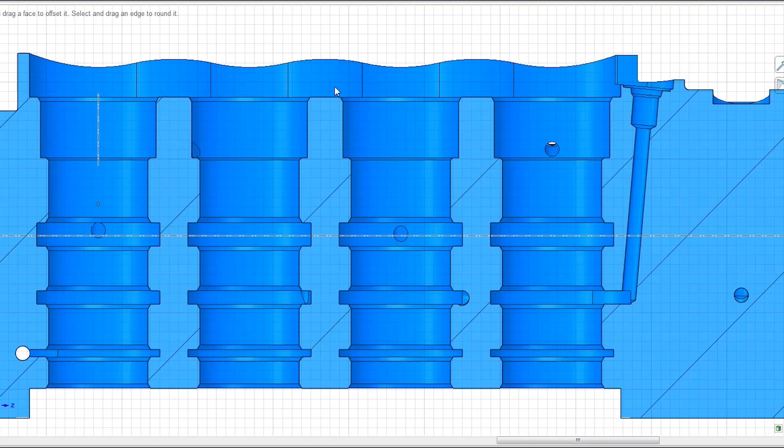Here's a section through the part that I'm dealing with, this titanium piece. Remember in the previous video we made this boring bar. And now we need another tool. We also made this undercut tool - there's an undercut here, and there's also one over here into that groove. But we still need one more tool.

We need this tool to cut these chamfers between the bore and the grooves. All these are 30-degree chamfers. So that's what this video is going to be about, making this tool here in order to do those chamfers.

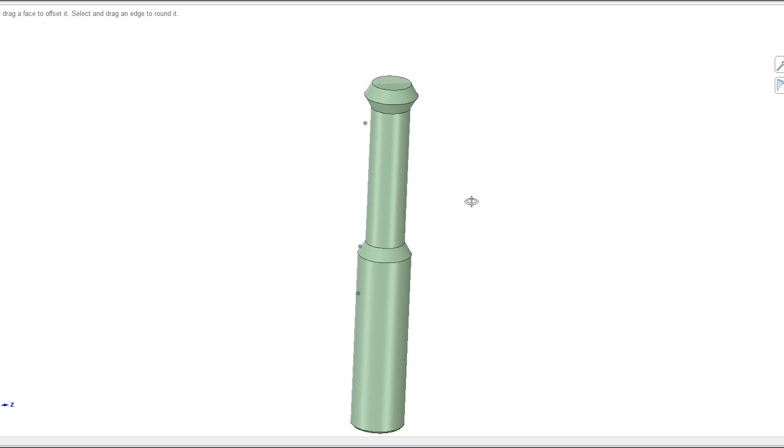This is starting at a 3/4 inch diameter blank, as you see here, and 5 inches long. Let's start a new model here real quick.

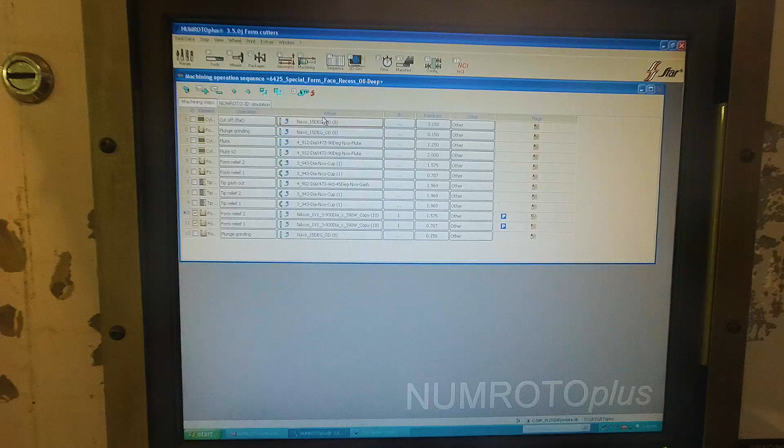This program here that you're seeing right now - I was making this tool for a customer, a local customer. They wanted to do some kind of a face groove like thing in the bottom of a bore, and this is the tool.

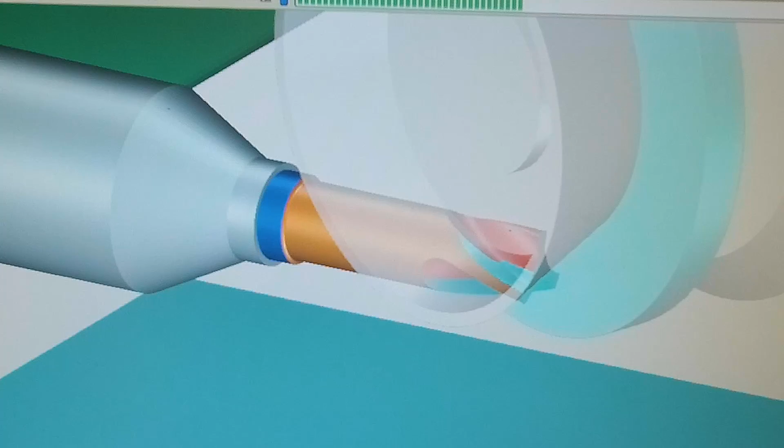So that's what this program does - in fact I could probably show you the simulation of it here. Might be interesting. Zoom in on it a little bit. So this is the tool I just showed you, and this is the simulation for it. There's the fluting wheel. The wheel that's highlighted in color is the wheel that's in grinding. It shows you kind of a ghost view of the other wheels as well, if there's more than one wheel on the wheel pack. So that's the simulation of that particular tool.

This is kind of a complex tool to grind here. You can see the geometry of it is, because of this recess on the face of it, kind of complex. This tool that we're going to program here is much more simpler than that. Anyway, that's the simulation of this tool.

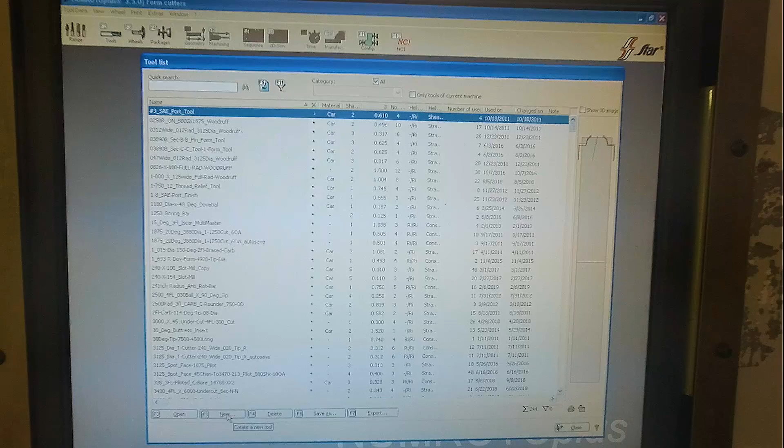I'm going to save this, and then what I'm going to do is, up here they have this little icon you can select, and I'm going to make a form cutter, and then make a new one, and manufacture it, not resharpen it. And for every form tool there has to be an initial form, at least one form.

So we're going to draw the profile that I was talking about on the drawing here. We're going to just draw this profile first.

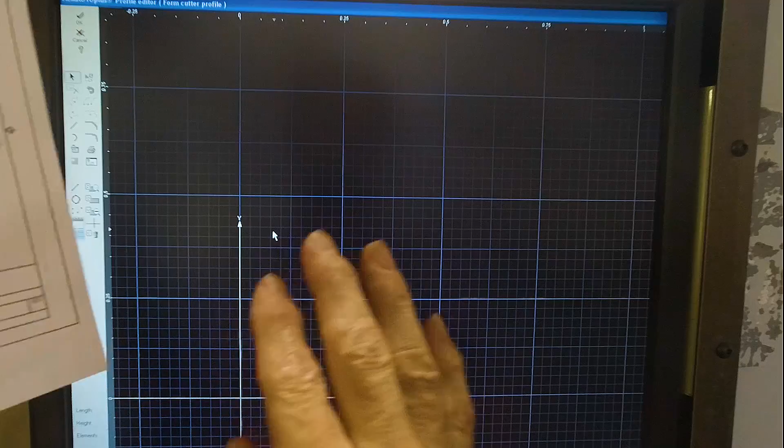So this thing is kind of reversed here, and the Y is going to be in the upward direction and the X goes this way. It's as if I flip this over, X being this way and Y being this way. In reality this ends up being like the Z-axis on the machine, but this is just the way this program works. So we have to make a line, and we've got to start it.

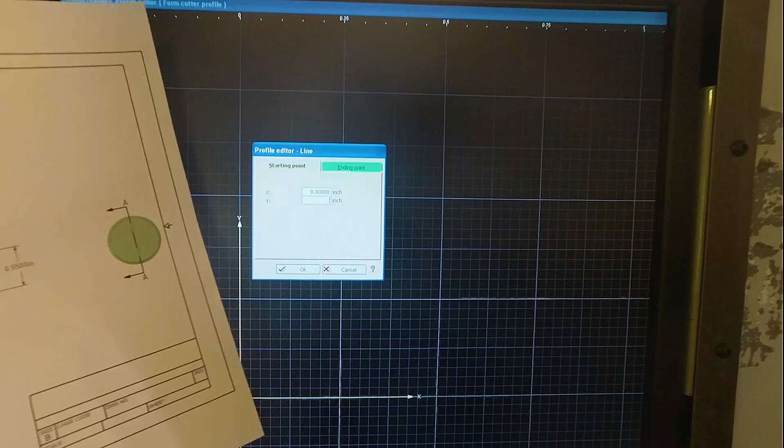Looking at the drawing again, 550 divided by 2, because this is a radius on this thing. So it's going to start at 0 on X, right? It's going to be 0.225, and then we've got to go to the end point, which is going to be 0.1732 tab.

And it's got a 30-degree angle. So we're going to go 0.375, half of 3/4. I must have the start point wrong. That doesn't look like a 30-degree angle, does it? What did I enter in wrong? Half of 550 is 0.275, right?

So half of 550 thousandths diameter is 0.275, and 0 is our start point. Okay, we're going to call that the first form, is what they call it on this thing. Okay, and we're going to say okay, and we're going to make another form.

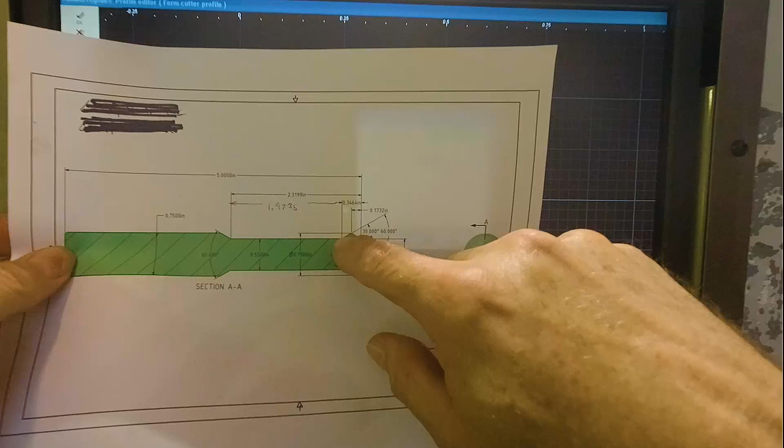We're going to do the back side of this form. So it's going to start at 0.1732, and 0.375, right, out there. And then we're going to go to the ending point, and you can enter a length and an angle here, but I know what the coordinates are of this.

The coordinates are 0.3464, 0.3464, and 0.275 again, like the other one. We're going to say okay. So that's the back side, our back chamfer cutting edge, if you will. Okay.

These here, you can kind of offset these profiles in the axial direction or the radial direction, or in the circular rotational direction on the A-axis rotation. So we can kind of see the beginning of our form right here. We've got the first one and the second one. Now I want to add another one.

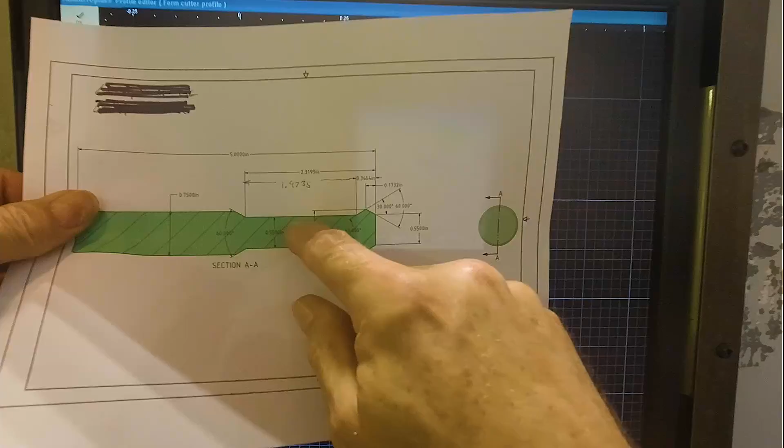This is just going to be for the purpose of grinding away this neck down area right here, and you'll see why later. It's going to think there's cutting edges on here initially when we process this into the program, the initial fields I guess, but we're going to delete those because we don't need cutting edges on there, of course. We just want that for the purpose of cylindrical grinding, if you will, off that area.

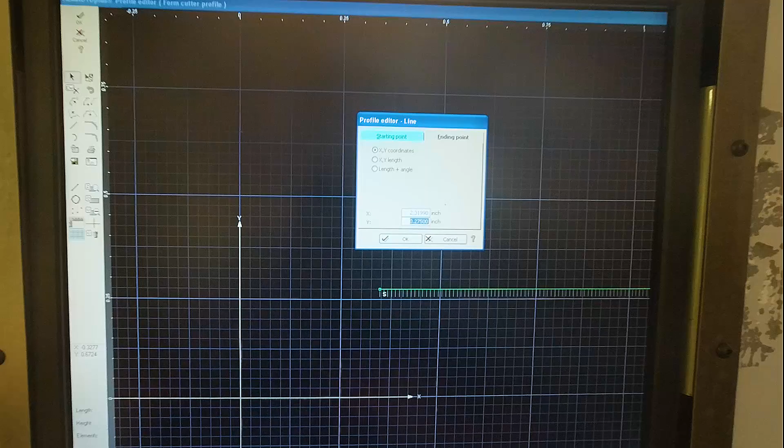So the X is going to be, the end of this is 0.3464, 0.3464, and the Y is going to be 0.275 again, which you can see that little start point right there maybe. Then we're going to go to the ending point and give XY coordinates again of 2.3199, 2.3199. Okay, so that's that one. Let's zoom back a little bit on that. I'm going to check that again, make sure it's not too long. Yeah, that's right. Okay, so we're going to go okay with that.

So we've got these three forms. You could do this all in one form, but I have found that it's better to do it in two different forms. It makes it easier to actually get it a little bit nicer when you grind it.

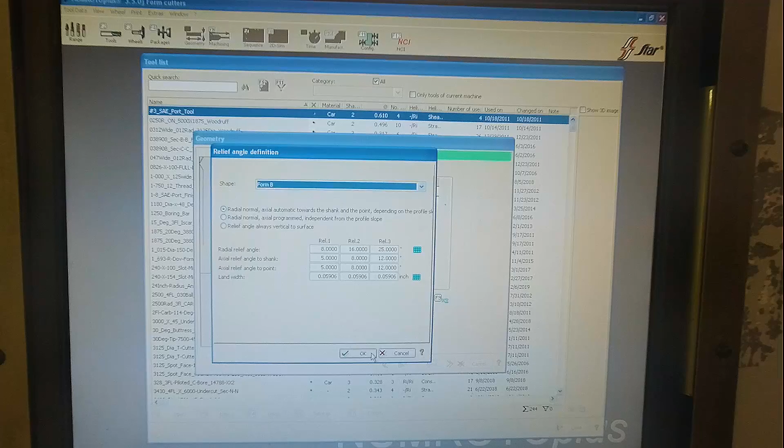Next, we've got to have a relief angle, and we're going to need relief angles on Form A and Form B. Form C, we don't really need them because we're not going to be grinding cutting edges on there. Form C, as you remember, is just for the neck.

And then we've got to have at least one helix. I'm going to make this a straight flute tool, 4 flutes. And the length was, this isn't really that critical, but it has to do with how long you're going to grind the flutes.

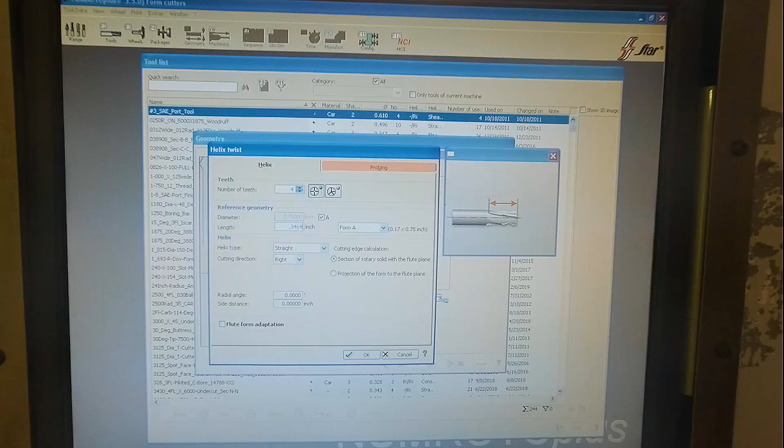But I'm just going to make it for right now 0.3464, the length of the last, this length right here. I can adjust the flute lengths anything I want in the flute grinding part of the program. Straight, right hand on form A is good. Form A and form B are actually going to be in the same place, but it needs at least one of these forms to know where to put the flutes, if you will.

Now on this software, you can do uneven, irregular pitch, I guess you'd call it—well, that's what they say here. You can put the flutes at uneven angles and things, but I'm not going to bother with that on this tool. I'm just going to make a plain 4-flute tool in this case.

So we would say OK. Then the next is the tip. If you want to have cutting edges on the tip of the tool like an end mill has, but we're not going to need that in this tool. We don't care about that. It's just a chamfering tool on the side.

So we'll go next. No coolant hole, carbide, and the blank here, it's kind of defined this blank the way it thinks it's going to be. It's pretty close. It's got a 5-inch long blank. I'm going to leave the rest of it alone, the default values.

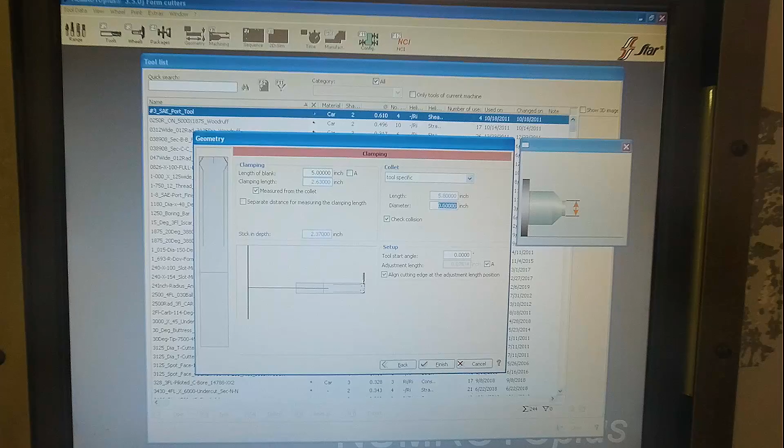Now I think I stuck this out — we'll see if this is long enough. I can always change this later. 2.630 — I think I stuck it out 2 5/8 from the collet, and I happen to know that the collet chuck and the collets are 5.8 inches long, and the diameter of that, let's just say it's 800 thousandths. So that's the basic representation of that. This can all be changed later if we find out we have a collision with the collet chuck.

Okay, relief angle. See, it kind of makes a basic program here for you, and you've got to assign grinding wheels and everything to this. Let's see, what are we going to use for this to grind this thing with? I think we're going to use...

First of all, we're going to insert an operation to just cut the end off flat. I usually do this with this grinding wheel, just so I'm sure where the end of this is.

We're going to go minus 0.4, and we're not going to retract along the path. No division means it's not going to do it every flute, it's just going to do it one time across the face. We're going to leave 0 stock on there, we want it ground flush.

I'm going to turn the... anytime you add or change a grinding wheel, you've got to specify the coolant nozzles it's going to use. So we're going to flute.

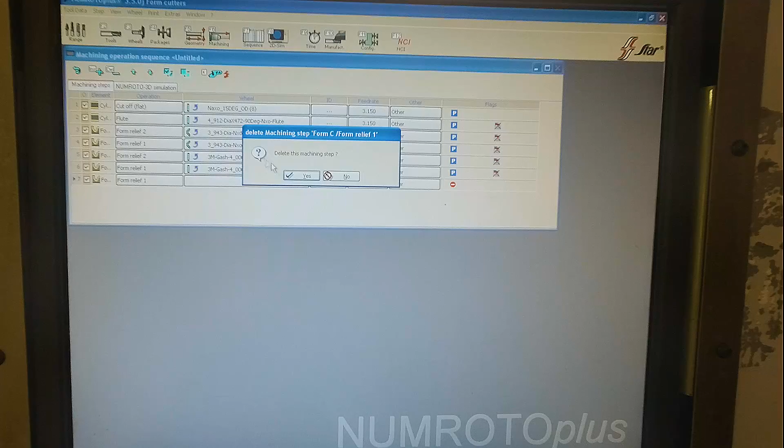Now I'm going to put the coolant valves on each wheel before I forget to do this. I can always do this later too, doesn't matter, but I'll do it right now. See, when it shows this little icon here, it says there's no coolant specified, and you usually don't want to grind anything on this grinder with no coolant on.

Okay, that's the basic program. Now I'm going to go in here and extend the flute length on the rear. I'm going to try 0.5 to begin with. I'm going to check these values here, the core, just to see what that looks like. So we're going to run the simulation just like this for right now.

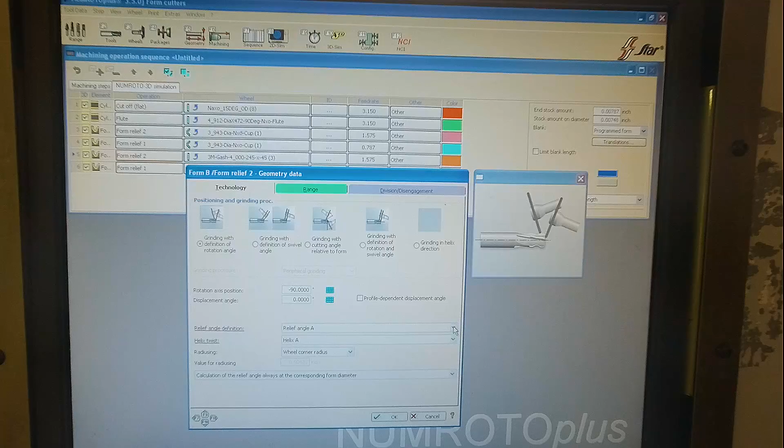Oh, I've got to change something here. I see, I forgot. I can use helix angle there, but I've got to have relief B on profile B, and relief B on that profile as well.

I'm going to change this to that, and that to that. On here, I'm going to change this. But I want to do face grinding with that wheel, 10-degree angle. I'm going to go minus, this is a 30-degree angle slope, so I'm going to go minus, say about 20 degrees. Let's try that, I want a little bit of an angle on the grinding wheel.

Change it to here and go minus 20. There's all kinds of different things you can do here on a relief, on a form tool type of profile, and you can actually specify the range.

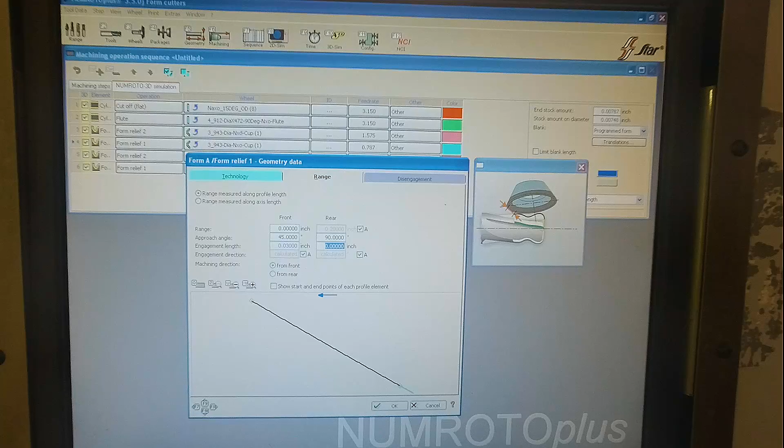In fact, I'm going to want to extend these. Should have done that before on the other ones too. I want to extend that one, I'm going to want to extend this one.

You can see it if I zoom back a little bit. You can see these little extra extensions it's put on the profile.

And on this one, I'm going to actually extend the one up here on this side 30, but I'm going to only extend this one about 10 because this is going up into my neck area of the tool. And also I might want to do a little bit of disengagement, change the disengagement on this too.

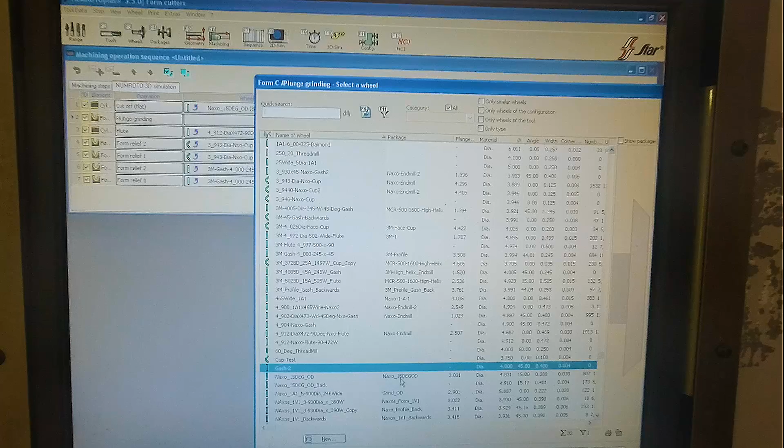I may want to grind, while I've got this tool here, I could insert, and on form C I can do a plunge grinding profile. This will be the neck of the tool, and I select the same grinding wheel as I'm using here, so I don't have to change grinding wheels too much.

Stock amount 0, I don't want to leave any stock on that. And swivel axis 15 degrees, the wheel has a 15-degree angle.

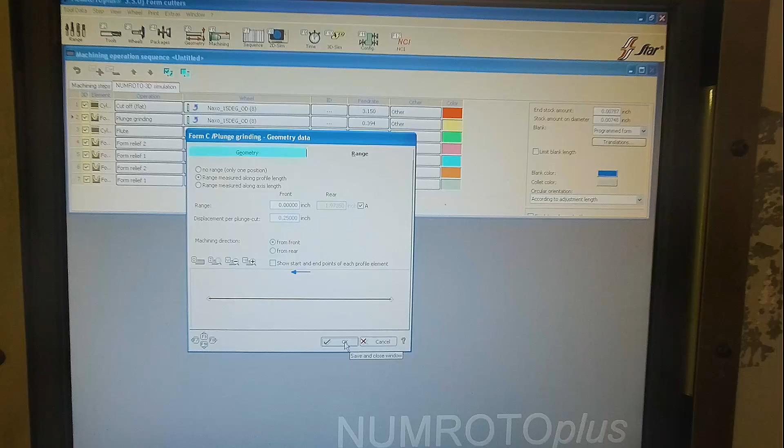And the range, displacement per cut, we'll try a quarter of an inch to begin with. That's going to be the amount it steps over every cut. I'm not sure, I might have to move this up on the end here a little bit. We'll see how that looks on the cutting end of the tool, if you will.

This I might have to rough off too with that grinding wheel. I'm just going to leave it like that for right now, just to see what we got going here. So that's the necking down. I'm going to have to adjust the feeds and speeds kind of on all of this still.

And I might want to rough in. Oh, see, this one's grinding on the wrong side of the wheel, so we got to change that, which is going to be over here, grinding position, grinds on the inner side of the wheel, as well as this one, both of those.

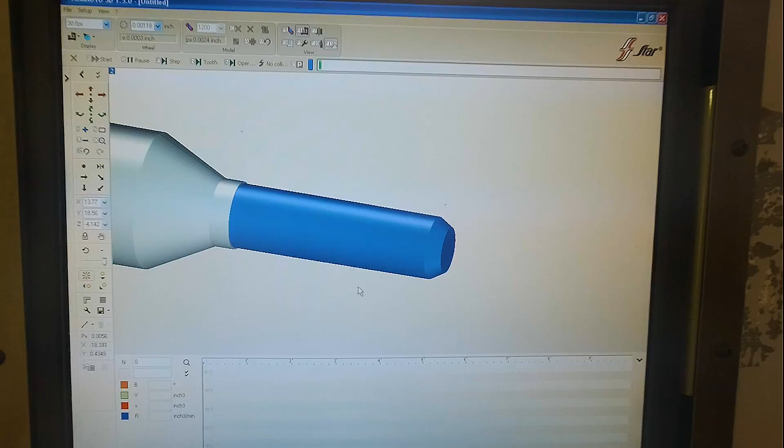Let's look at the simulation again. See, because it's totally ground away. I may want to try to rough off some of this material because I don't want my real sharp pointed wheel grinding that off. And I might want to reduce the core diameter here too, it looks like.

It doesn't look too bad, except I don't like, see that our flute is not going far enough up, see how the side of the back of the flute is kind of tapered. I don't want that, but it's getting close there.

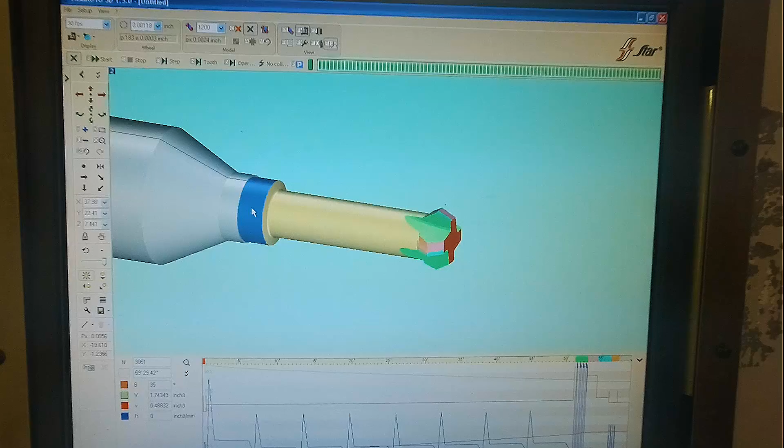Now I probably want to grind a chamfer up here, but I might have to extend the tool out a little further out of the collet chuck to do that.

Let's go back further with the flutes. See, these are the kind of things that you— I'm going to reduce the core to 0.25, there.

You can play with the geometry and everything of these. If you have, you can put flute wash out on the end. I don't think— well, let me put that on the end. Let's see how that looks. It might help a little bit too.

I don't like to change too many parameters at once. Otherwise you can't remember exactly everything you did.

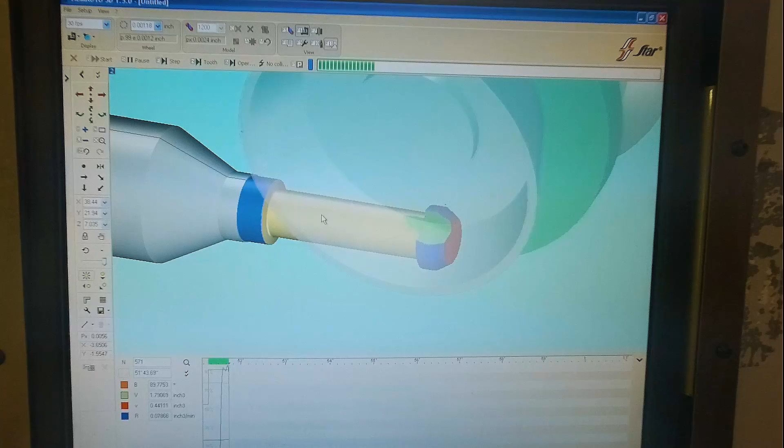Okay. I didn't like the way that— I don't like the width of these lands. I'm going to reduce them. I didn't like the way, I thought I had face grinding. Oh, I didn't put it on both of these. I put it on this one.

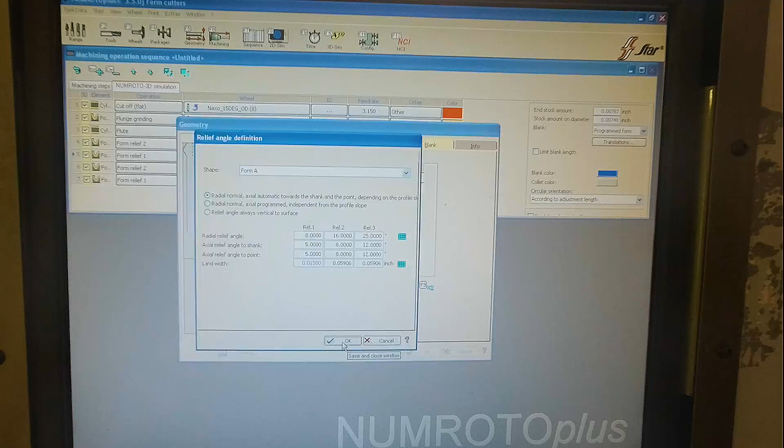Okay, that. I'm going to go up here to my relief angles, or my relief definition, if you will. And I'm going to put 0.015 for the— if you have, I only have 2 lands on here, but if you have multiple lands, then you have to do this second one.

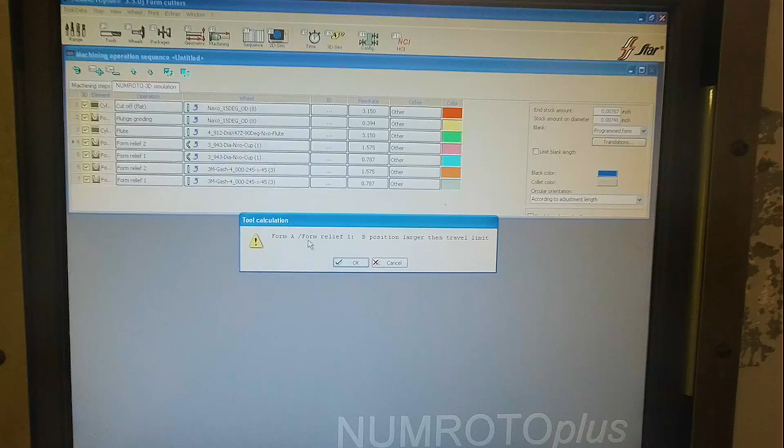Form A, relief 1. Wait a minute, let me look at this. What did I do here? Minus 10 degrees. Well, this was 20 degrees, right? Oh no, minus 20 degrees. I just didn't enter that in correctly.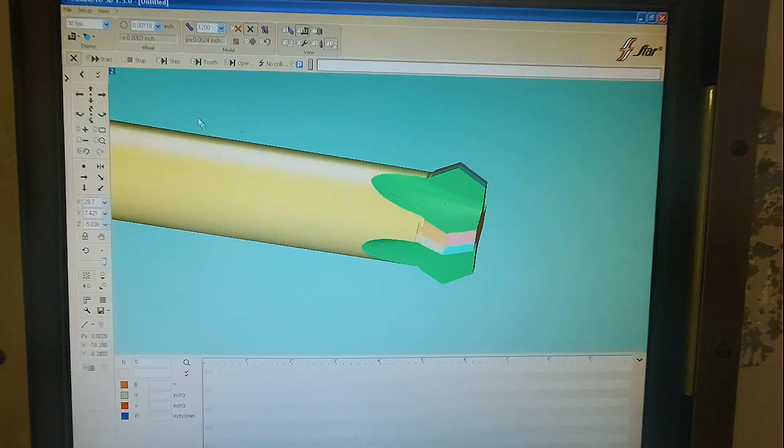See, so this is what you go through. You kind of make changes, run the simulation until you get this picture to look the way you want. That's basically all there is to it. But there is a lot of different settings you can make, as you can see already.

See, I don't really want to grind all that meat off with that delicate grinding wheel, if you will. And I might want to even reduce this core a little bit more.

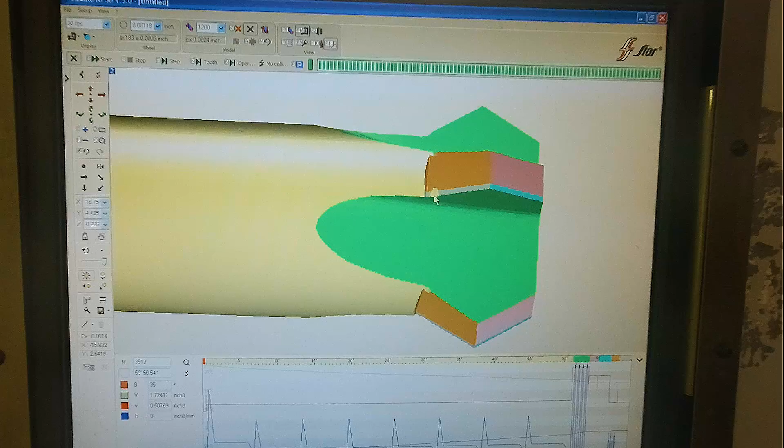See, I'm hitting in here with my grinding wheel that's necking this down, so I might want to move that out a little bit. I'll just make these little changes. Let's move that out 30 thousandths, like that. Make these little changes one at a time.

Because like I say, I think I'm going to actually make two changes here. I'm going to do this core. I'm going to go down to 0.200. See what that looks like. It might be too much though.

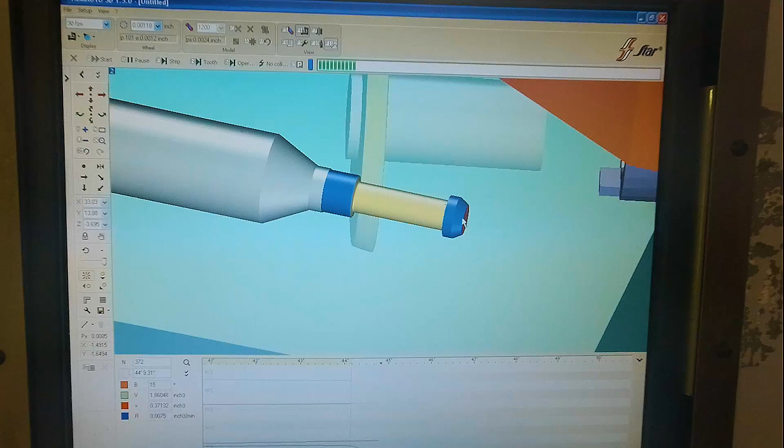I'm going to put another profile in here to take this grinding wheel and rough off some of this stock and this. I actually need to draw the blank the way it really is.

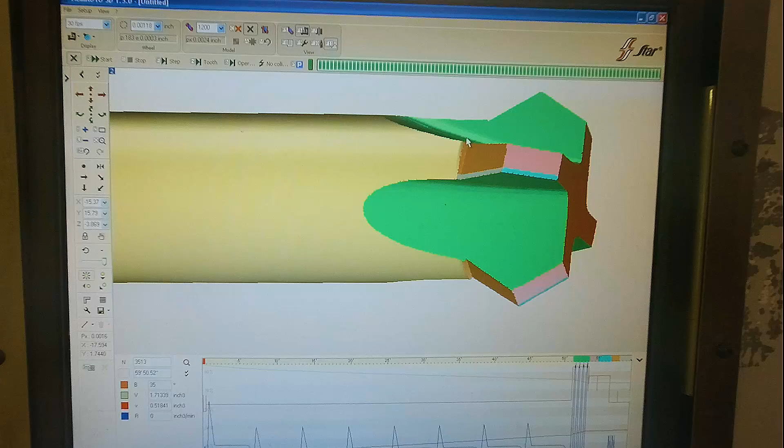Okay, that looks better. I'm going to extend the back of this a little bit more up in. See how I've got this little ridge here? I'm going to extend the back of that a little more up into the

neck down area. I'm going to also redefine this over here. This is end stock amount. We'll put 30 and no stock on the diameter of the blank. This is going to make it look like a cylindrical blank like it really is.

And on these, the range. No, that's the wrong one. It's this backside. The range, I'm going to go also 30 thousandths into the. Might be too much. Let's see what that looks like.

So you're going to see the blanks different. It's going to ask me if I want to update it. You see now it looks more like it really does.

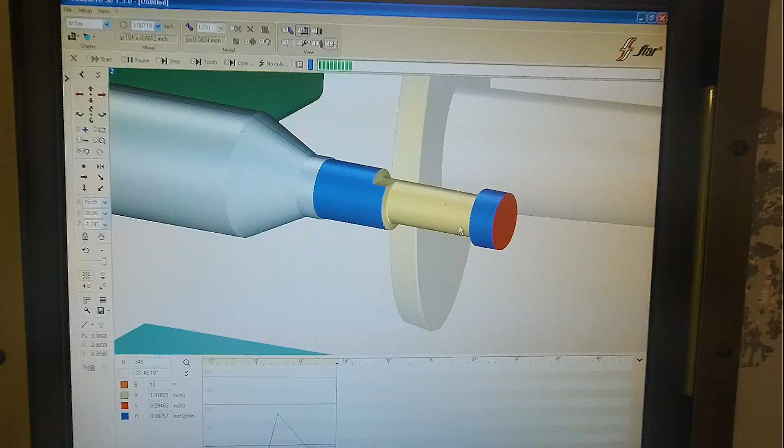Right now I just want to verify that I've got the basic program correct. I'm going to put these angle grinds in here with this wheel after I get things the way I like it here. So I don't have to take that big chunk off with the

more delicate wheels. So that looks pretty good. I'm kind of happy with the way that's starting to look.

So now let me think about how I need to put a profile to the plunge grinding. Let's do it after that. Insert a manual grinding path.

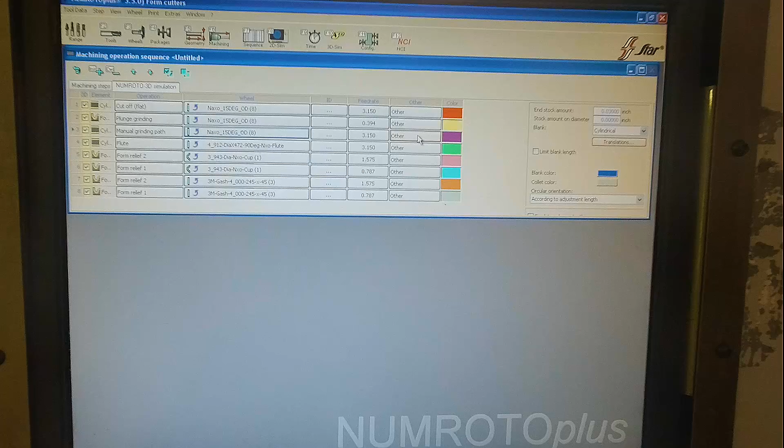Here, and this is a little bit. We'll put that same grinding wheel that I'm using above. Depends on what side of the grinding wheel I'm grinding on here. Which in fact, let's see, I'm going to be grinding on the front for this side.

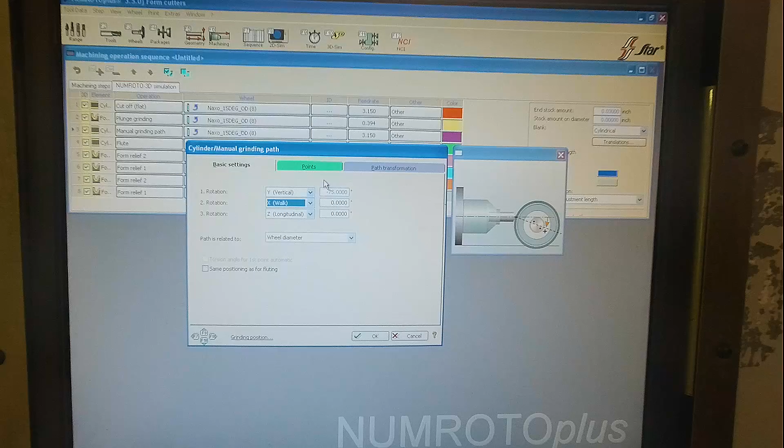So I'm going to tip this thing. I'm going to say negative 75 degrees. That's the y-axis rotation, which is really the b-axis.

I know the y, they call it y is vertical, it goes up and down, but the rotation, if you have it on a rotation, which is what this is saying here, it's going to rotate that. I believe negative 75 is going to be all right.

We're going to say we're going to come up minus 0.5. Everything in front of the Z normally on a CNC machine is in the plus direction, but on this programming it's in the minus direction. It's kind of like the Mazak is the same way.

Cross vertical, it doesn't matter, that's going to be up and down. We want it centered on the part. Cross is going to be in essence the x-axis, and we're going to say, well, actually I'm thinking about the way I'm going to do this.

Point. What, you got more? Those were the older ones on the 309 piece order.

Okay, 3/8. I'm going to try to just grind straight in with this one. So I could probably start here minus 0.1. I could start closer than that. And I'm going to move into this, something a little short of this dimension here.

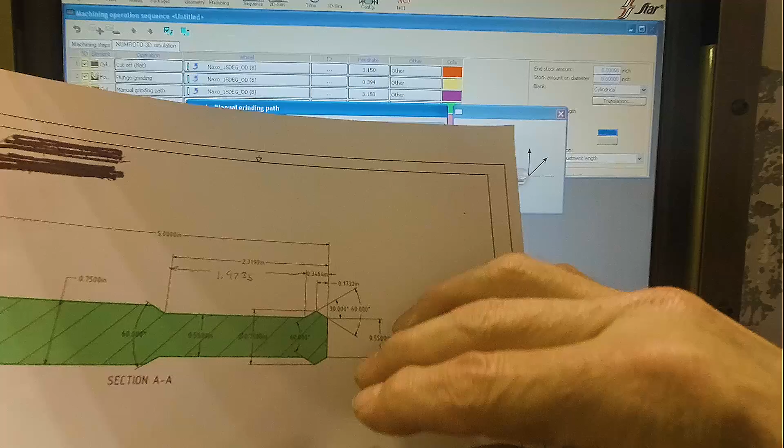So we got this wheel, it's going to be on this side, it's going to be tipped like this, but it already has a 15-degree angle on it. Well, actually, I've got this totally wrong. So this would be minus 90.

No, I think I do have it right. Minus 90 plus 15, 90 minus 15, it's 75. Yeah, that's right, I think I got that right. It's either minus or plus. I get confused sometimes with this.

And we're going to just feed straight in to 100. We're going to go a little less than 100 and, well, yeah, let's just go 173. We might have to adjust this Y dimension.

Well, actually, I'm going to go to 0. I'm going to feed that a little bit faster. We're going to leave it at 1 for right now. Then we're going to go to minus 0.173.

And here we're going to rotate 360 degrees doing it. And then we're going to stay there and rotate another 360. This is in the incremental mode here, so when I go back here, it's going to be 720.

So that just kind of cleans it off, because right now it's spiraled in, and then it's got to rotate another full revolution to kind of clean it off into a cone. And then we're going to move back to minus 0.5.

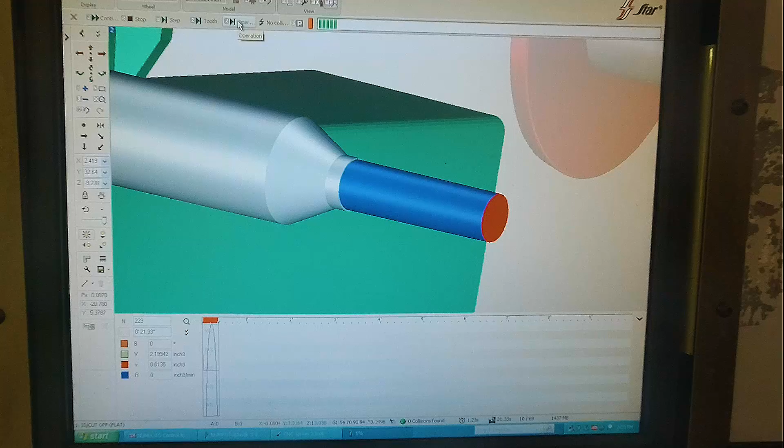We're going to run the first operation, which is facing it off. Next operation is doing the neck. This neck doesn't really have to have a good finish or anything, it's just clearance.

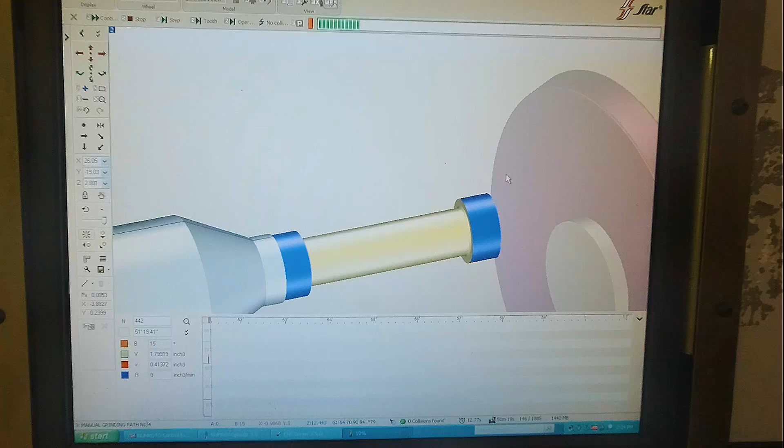Okay, now I'm going to step up to this. See, we're coming up here. We're obviously on the wrong side of X. See how we're opposite to where we want? So I got to go back here. See, I get confused about these sometimes.

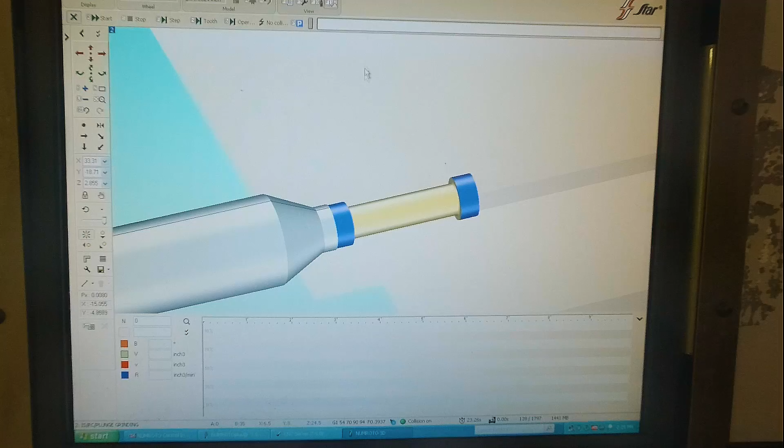I can jump back and forth between incremental and absolute, and get those all entered in at once. I can actually save this so I don't have to keep rerunning this graphics. So I'm going to save this as the tool blank right here when it finishes. I'm going to stop and save that. Then I can go back and just rerun this by unchecking those. So we're going to step into this here. Now you see I don't have to rerun those.

It's got the blank already. Okay, that doesn't look too bad, except it's going to be doing it 4 times for every 4 flutes, because I forgot to do this. Over here, division, I want to have a separate division of just 1 time.

Okay, so I think that's it. Down here at the bottom of the screen it shows me kind of my load, but it's hard to tell right now until I run the whole program to see what this load down here is in relation to the rest of it. So now I have to do this side of the thing, and I've got to think about how I'm going to do that here.

I'd like to do it with this same grinding wheel, and I think I can. Let me think about this. Okay, so I'm going to do another manual grinding path. Insert that.

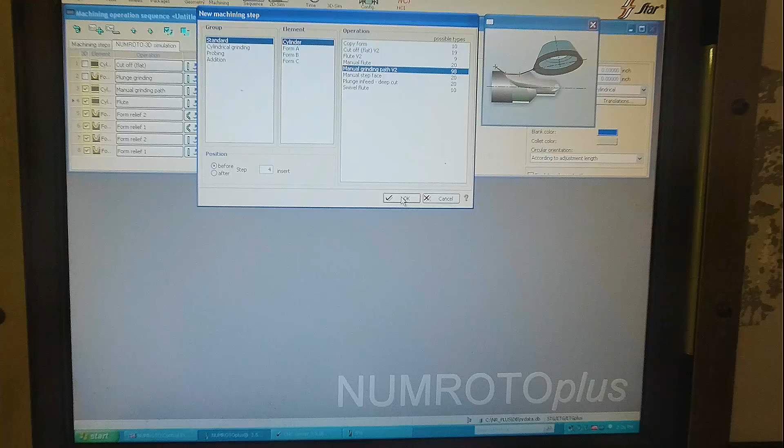And on the same grinding wheel, except now I want to tip this thing minus, it's going to be a 90 plus 45, minus 135. Let's see if we can do that.

And we're still going to grind on the front of the wheel, but we have to come around the part this time, so we're going to minus 0.5. We're going to start at 0.5. Well, no, we don't have to be that far away, we can be half of this, 0.450, we'll say. And we're going to go to plus, in this case, 346. This is just roughing off some stock, we're not going to worry too much about it.

And we're going to feed that kind of fast going forward. And then we're going to come into 0.375. And then we're going to go to 0.275, was half the size, so we're going to 0.275. We might have to adjust that a little bit. And let's make a revolution coming down in there like that. And then we're going to stay there, make another revolution. And then we're going to come back out.

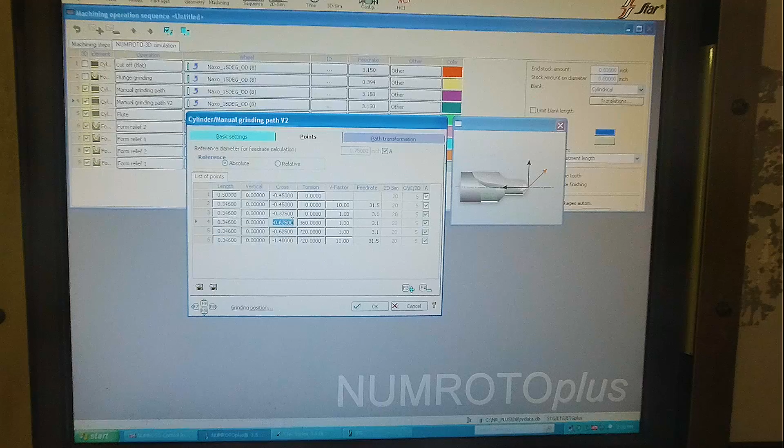These all have to be minuses though, don't they? To minus 0.5. I'm going to adjust feed rates and everything later, I just want to make sure I got this right. Let's just see if it likes that. So start, we're going to do that operation. That looked sort of alright. We've got to grind the whole tool to see if that is alright.

And then we should be able to come in here. Oh, it's liking it on this side. So I think my minuses are going to be wrong here. Not too bad. Okay, doesn't look too bad. I might have to add stock to that.

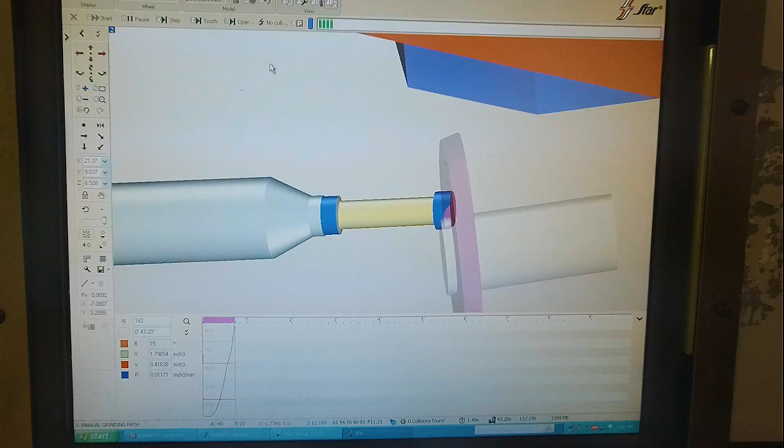And you see it's doing it every 4 flutes because, again, I forgot to check that right here on the division. Okay, let's grind the whole tool here and see what it looks like now. If we've left enough stock here we'll see it, if we haven't, see if it cleans up. It looked like it did alright.

So the only other thing, I'm going to want to grind a chamfer up here on this, just for a little bit of extra clearance and everything. So let me add that while I'm doing this. Insert, and I want to do another manual grinding path, same wheel. And this is going to be very similar to the first one.

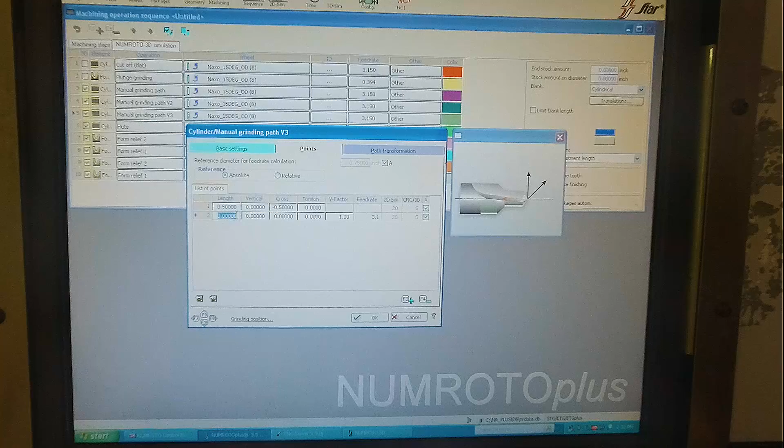So it's going to be minus 75 as far as the angle goes. Points are going to be, I'm going to start here at minus 0.5 in front of the part, and minus 0.5. We're going to go to, what was it, the end of that is 2.319. We'll go to 2.3, and also at minus 0.5. 10 times the feed rate. And we're going to come down to minus 0.375.

And that might be... well, we'll try that. Might be colliding with the stock right there. And then, actually we're going to be grinding with the back of the wheel in this case, so that might be alright.

And then we're going to go to minus 0.275. Might have to change these minuses to pluses because we're grinding with the back of the wheel. We're going to rotate it around once, and then go 720 and rotate around again. That should be... yes.

And then we're going to come back out minus 0.5, and we're going to do that at a high feed rate. Okay, but we're going to be grinding with the back of the wheel here. Grinding position, grinds on the inside, division only one time.

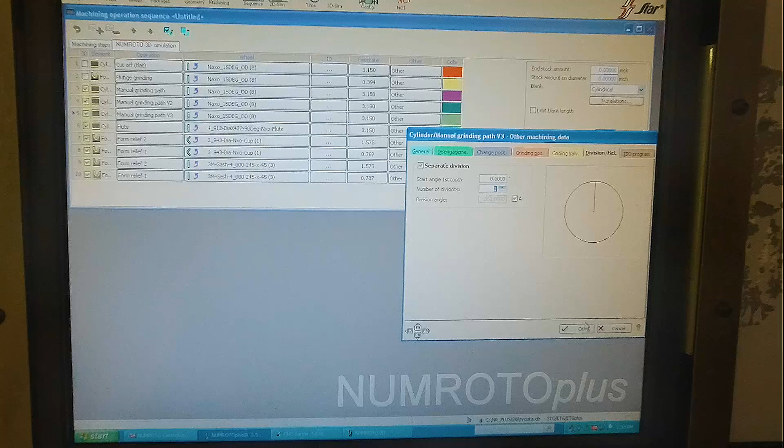Maybe, I think I might have something backwards there. Yeah. A lot of times when you reverse the face of the wheel, you got to change this angle to positive. I still might be on the wrong side of the deal too. Operation there, operation there, kind of looking at it.

Oddball here, now let's see what happens here. Yeah, see, I'm on the wrong side of the part because when you change the minus, it's going to be positives on these 0.5.

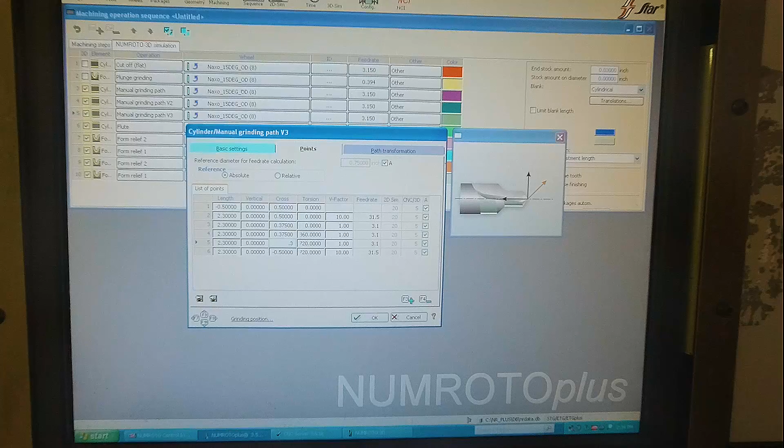We're going to see what it looks like. I don't want it to... I'd rather leave a little bit of a... yeah, let's step into this again here. I'd rather leave a little bit of a step in there than to grind into the shank. See, it's too deep.

For some reason, this always kind of ends up this way. It's kind of hard to get this to blend to the shank real nicely.

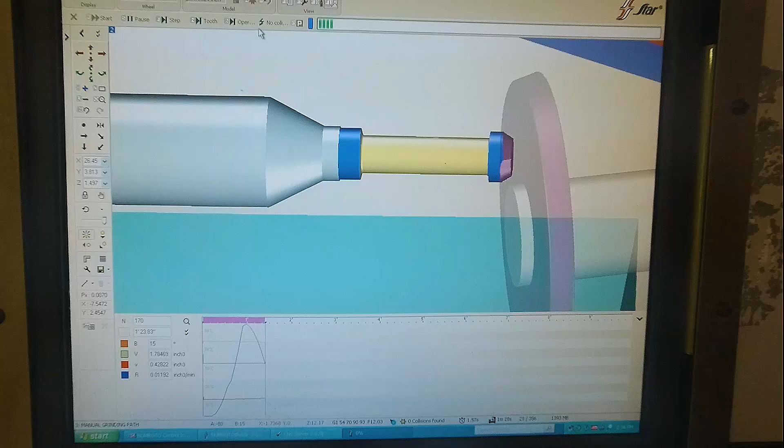So we can transform this actually, which is the easiest thing to do. So we got to add... let's go, but we want to shift it longitudinally. I think it's going to be minus 0.030. Let's try that, see, I don't know if I went the right way with that. Sometimes those shift things are opposite of the regular programming.

Now see, now that looks sort of decent. Maybe a little bit more. I'd rather there be a little bit of a step here than this little ridge sticking out like that. So let's go minus 0.040 on that.

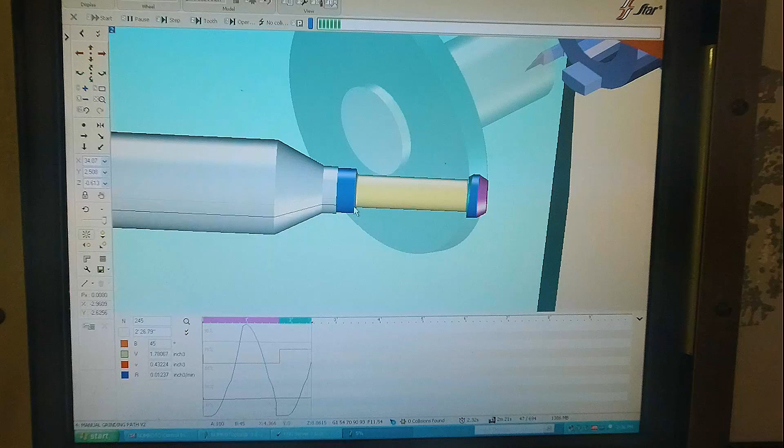And from past experience, well, let's see what that does. Okay, we'll try it on one. Shows it's not going to be hitting the collet, but it's awfully close to it. I think we're going to extend the tool out a little further.

That's basically all there is to it. I might, but I'm noticing down here the feed rate. See, this fluting cycle is loading, taking a lot of load compared to the other cycles. So what I might want to do is reduce the feed rate on that, which is going to be this, and I'll reduce it down to 2 inches, and we'll look at it again here.

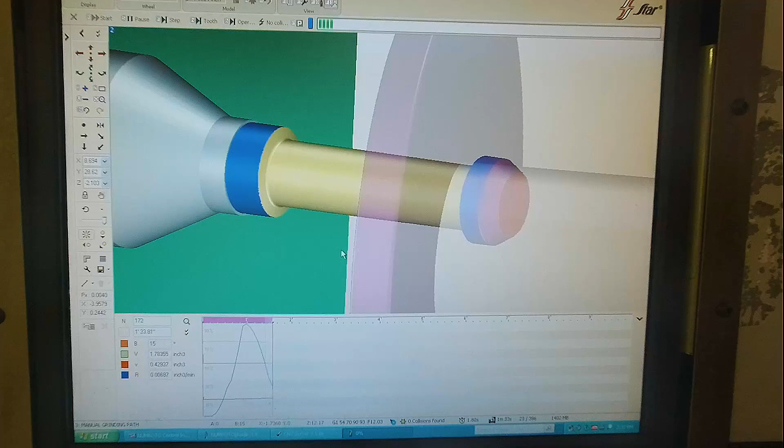See, it gives these loads, these load rates, or grinding load if you will, are kind of in relation to each other. It's kind of a little hard to tell. See, that's better.

When it finishes the whole thing, it'll show... it's kind of a little hard to tell what this means in a way, because see, there's certain lines here, which is volume of material being removed. And this is what you can in effect call the spindle load on here. And although it says like 90% here, it's really not that. It's in relation to the other grinding cycles here. So you've kind of got to interpret this a certain way. But the thing is to look for is any big huge spikes in this.

Let me run the whole thing because I'm not running these two. And I'll start from the beginning because we might have something else that has a big spike to it that we're not seeing yet because of this OD necking down cycle. Let's see what it looks like in relation to the rest of them.

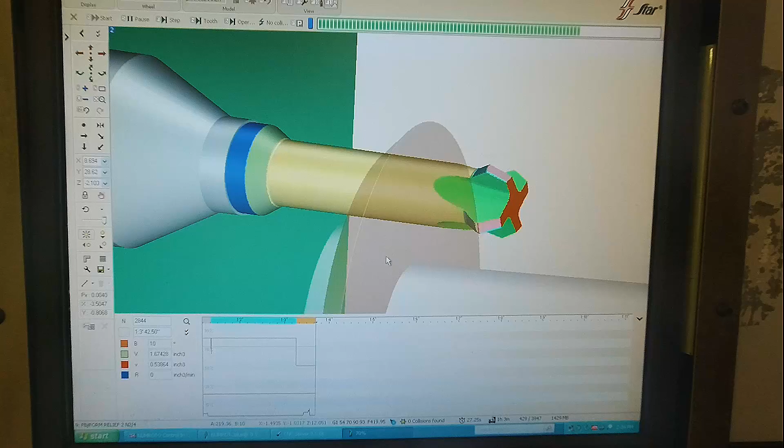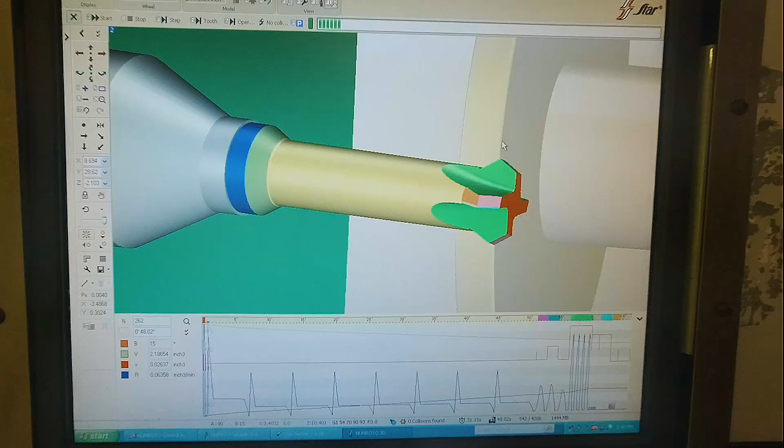And we'll see the whole thing now. So you now see this cutting off flat thing. It's got a fairly good spike. It might be all right. This is the first plunge of this wheel in here. So if I position this, I can kind of see it when it plunges in, it's peaking there, and then it tapers off a lot.

So what I could do is increase the roll off rate of this plunge grinding. The plunge speed, if I leave that the same but increase this, let's increase it to 2 and see how that looks. Now we're getting a lot more material removal in relation to time, if you will.

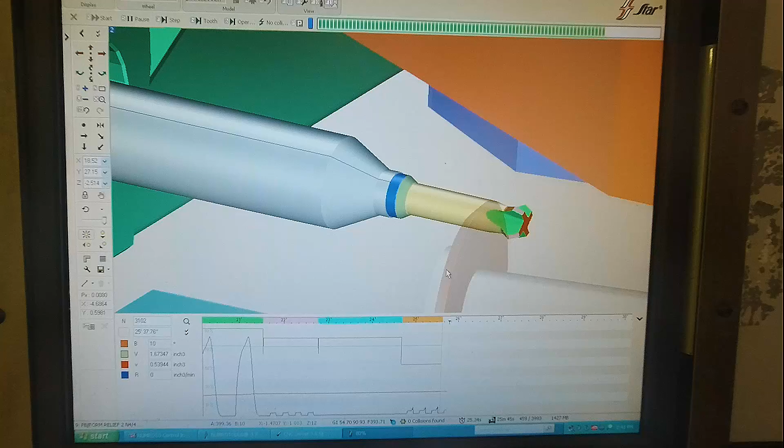And it might do that. You have to just kind of be ready with the feed override on this, in the beginning, and then you can adjust your feed rates in your program. Although these two cuts are kind of a little bit strong, I might reduce this to 2.5, and I'm going to reduce this plunge-in amount 0.25. I'm going to leave the roll off the same. So you just kind of run this over and over again.

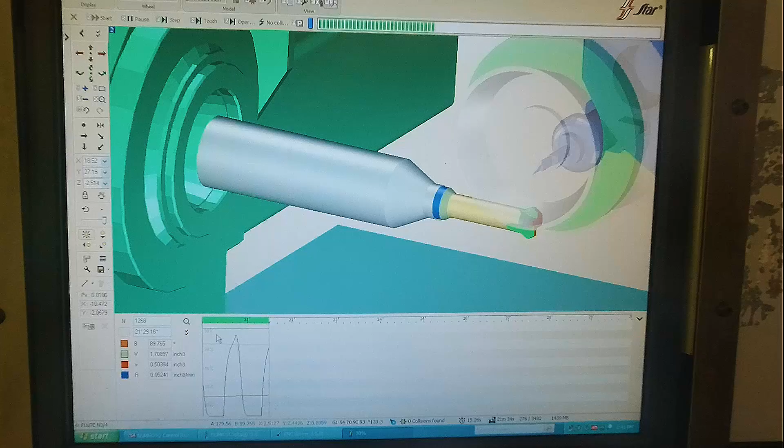Okay, the facing or the cutting off flat looks fine now. And usually I don't like to run these, it comes up with some pretty... well, these aren't too bad. I like to reduce these feed rates a little bit on the cutting edges. It leaves a better finish on the cutting edges. This is the secondary relief here, but this is the cutting edge.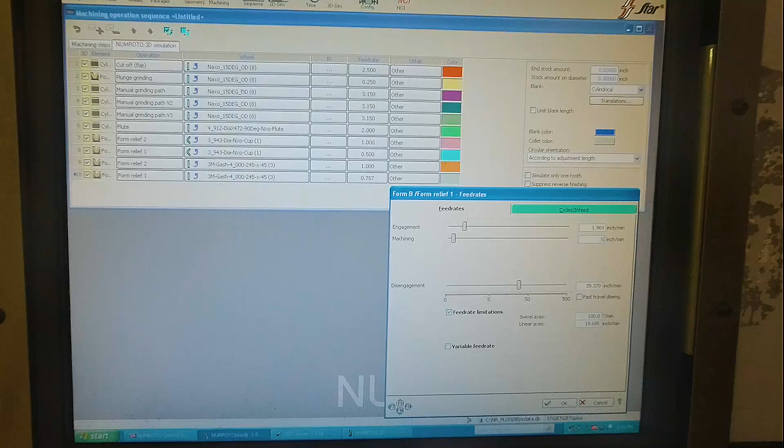0.5. What did I have that at? Yeah. And then we can kind of do a time study here. Okay, we know that. Well, that might still be all right. 32 minutes to grind the tool. It'll really take longer than that.

Particularly if you have to rerun anything. Although this is not too critical. This tool, I can adjust the offsets on the machine when I'm running it to compensate for any differences in where this tip is actually.

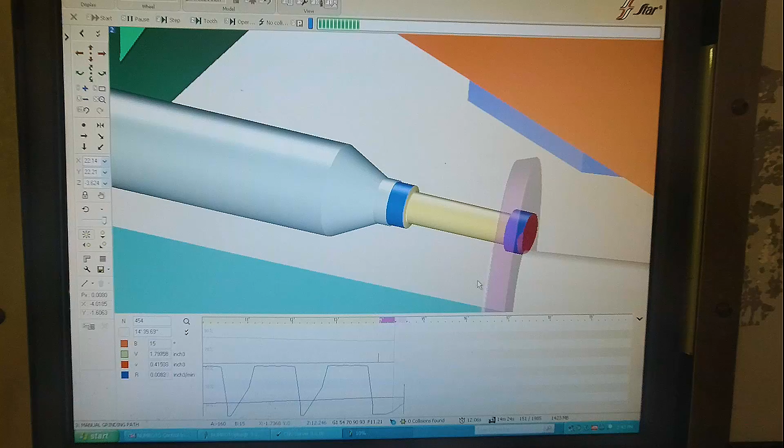Pretty happy with that. I think that's going to work right there. So that's what there is to programming on this thing. And now I just got to grind the tool and see how it comes out.

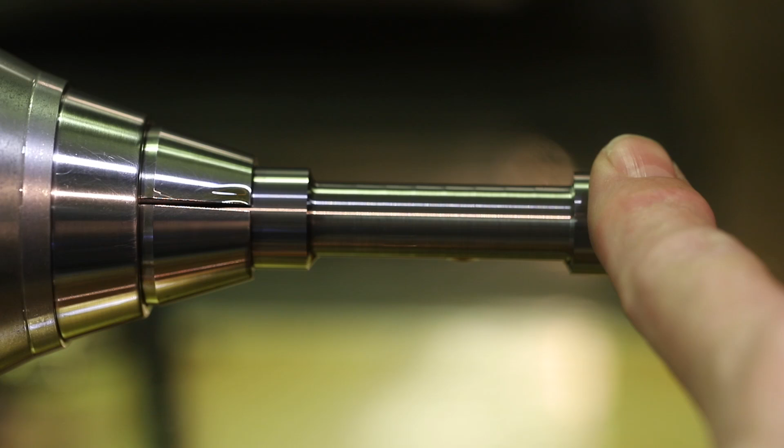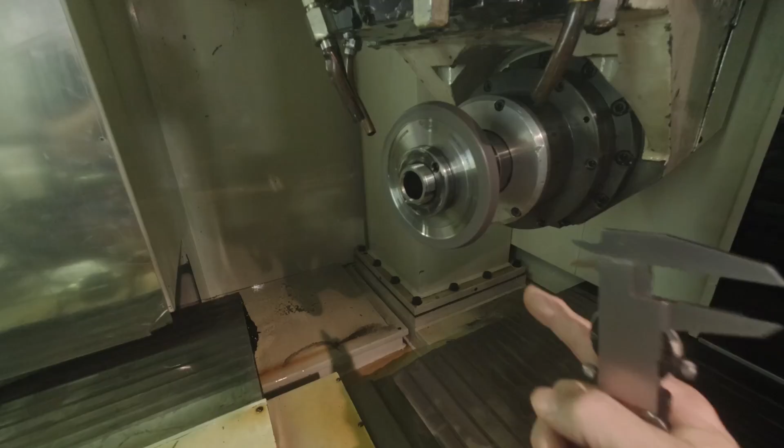Here's the result after just grinding the face and the neck down, the first two processes in the program. This particular wheel here - I can't really take video while it's running because there's too much oil and you really can't see anything.

This is what it looks like after the next three processes, which were the angles. So this is the chamfer at the end of the neck, and then these were two roughed off these areas so that the next grinding wheels don't have to take so much stock to grind the flutes of the tool, the cutting edges.

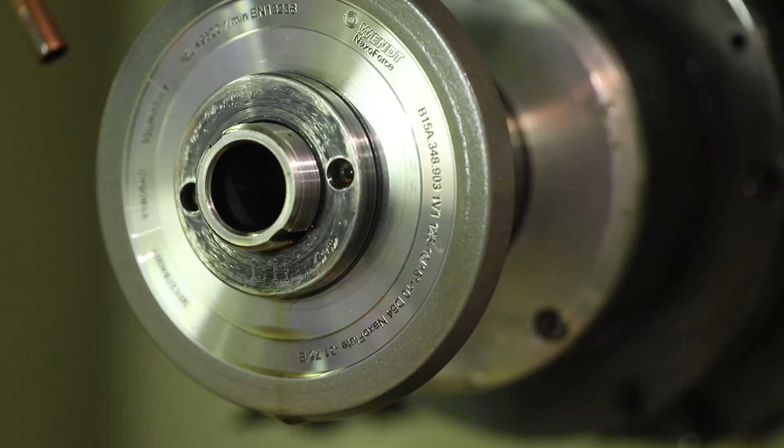This little bit here, if you can see that, is left because the grinding wheel here has this radius bigger than what's specified in the program.

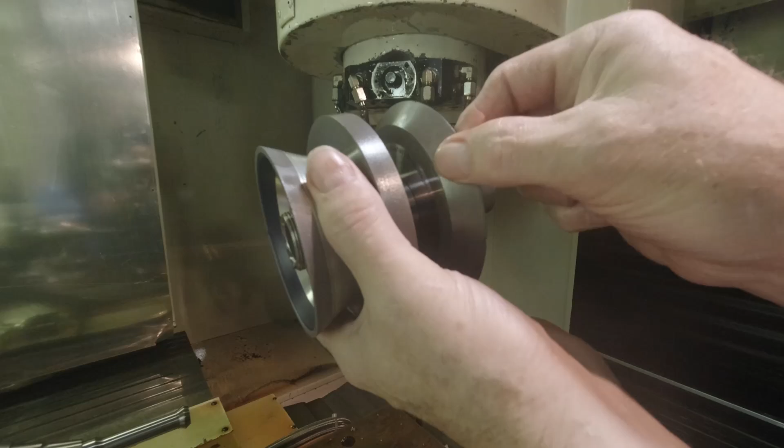Release this wheel. Put this wheel pack in. We're actually going to use this wheel and this wheel. We're not going to use this. This is normally the gashing wheel for a regular end mill - gashing, the fluting, and the cutting flutes. But we're going to use the first two wheels. Clamp that in the spindle.

Take this out. Change the coolant manifold to the proper one. There's a tool, a wheel pack changer on this machine, but I find it just as easy to change these manually as to use it.

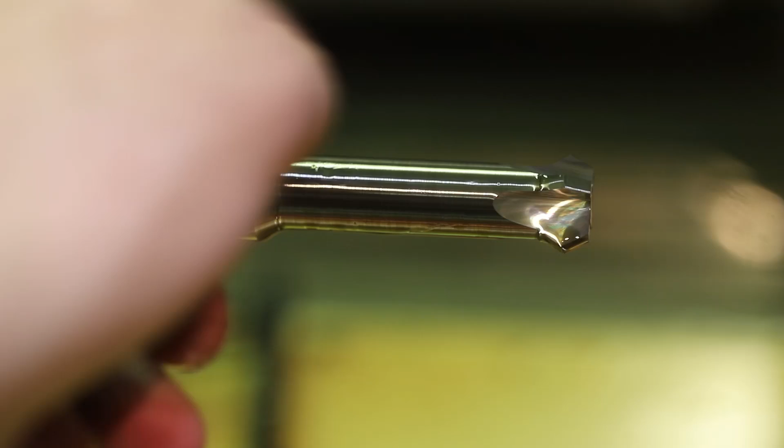Here we are after the next grinding processes, which is the fluting, and then the first and second clearance angles on this. You can see them right here. You kind of rotate this, so you can see them on only the front angle here.

Here we got to take this grinding wheel out, this pack. And we're going to put this wheel, this is the last wheel, in. Make sure it's clamped. Change the coolant manifold. Back to this one. Grind these back cutting faces. Program, we got to go over to here.

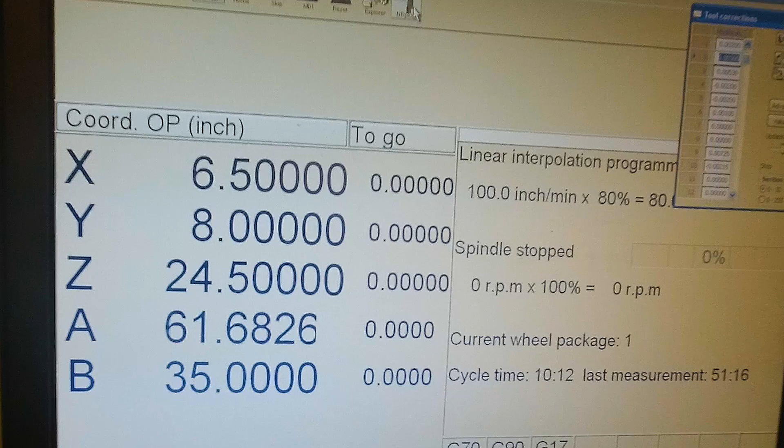First we got to tell it that grinding wheel is in the spindle, which is going to be this one. Okay, then we got to uncheck these and check these two grinding cycles, I guess you call them, for this particular wheel.

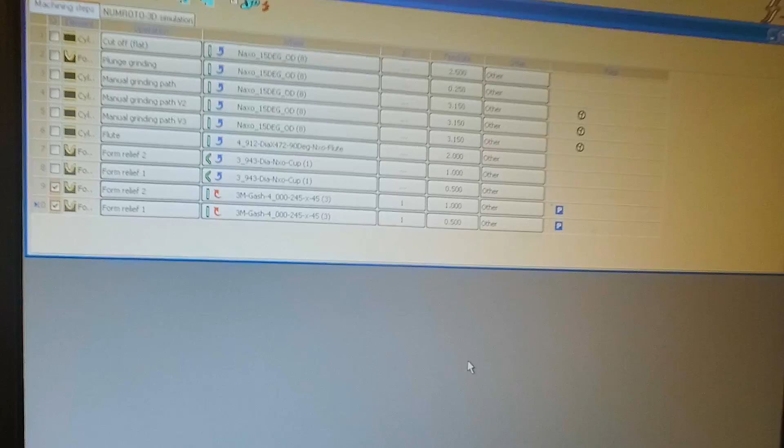And then go up here to manufacturing. We're going to use the previously detected values on the probing, so we're not going to reprobe it, and we're just going to say manufactured, go, or whatever. And then down here we can see it working. We're going to change over to the machine's display, and it's ready to go.

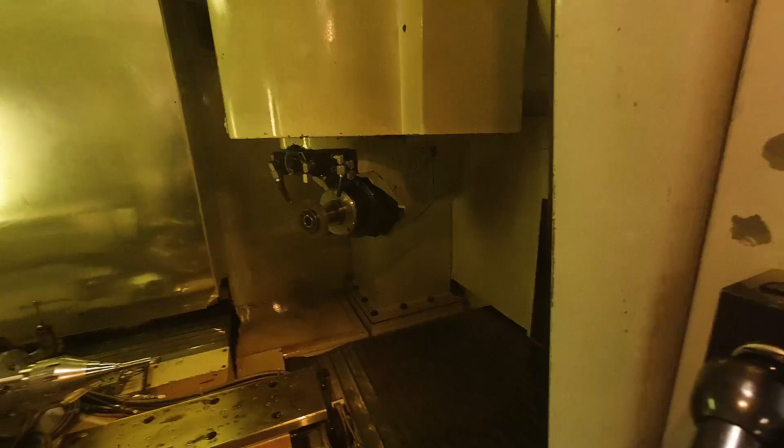I'm going to close the door so we don't get showered with that nasty oil, and push the start buttons. And as you can see, you really can't see anything at all. Finish grind, which would be the back side here - the primary and secondary cutting edges of the back side.